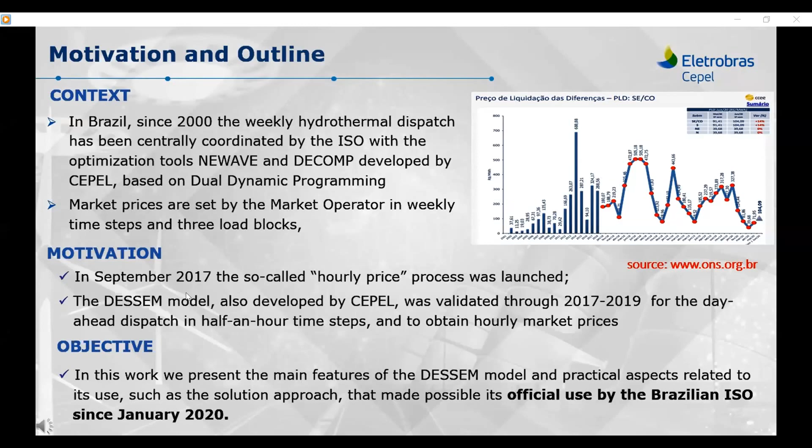Here we can see the Brazilian generation mix that shows the hydro-dominated characteristic of Brazil. The hydropower plants still account for around 70% of the total installed capacity, and we can see also an increasing participation of intermittent sources.

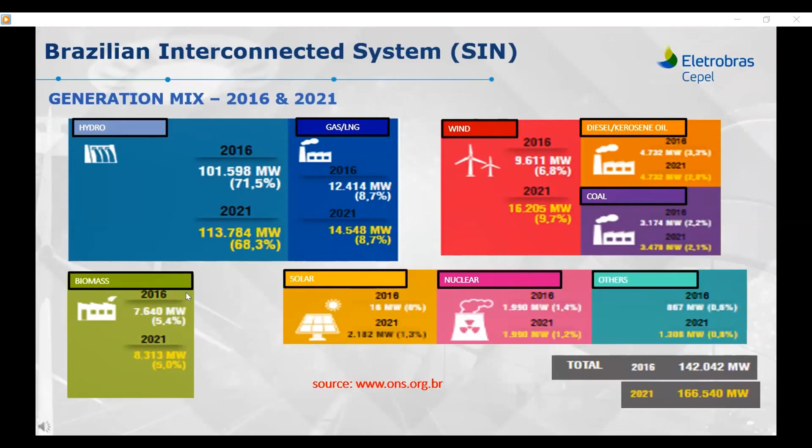Brazil has a large-scale system, predominantly hydro, with stochastic inflows to reservoirs and long distances between generation source and load. In this figure, we can realize that operating the system is as complex as operating the whole European electric system.

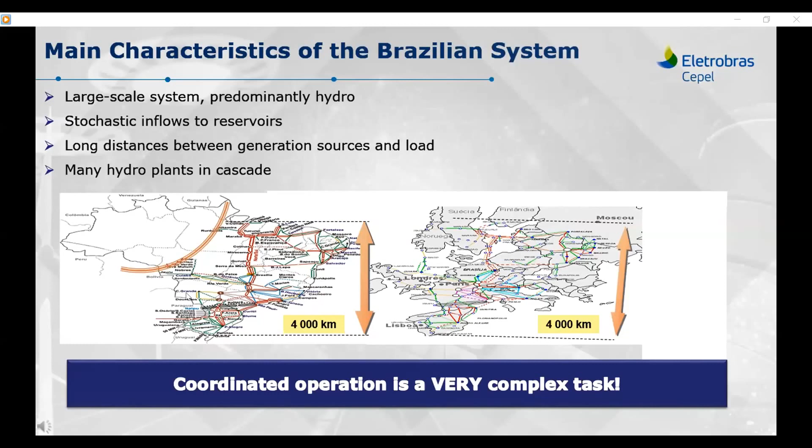In this diagram, we can see the total amount of hydropower plants throughout the whole country, coupled in cascade, that are centrally dispatched by the Brazilian ISO.

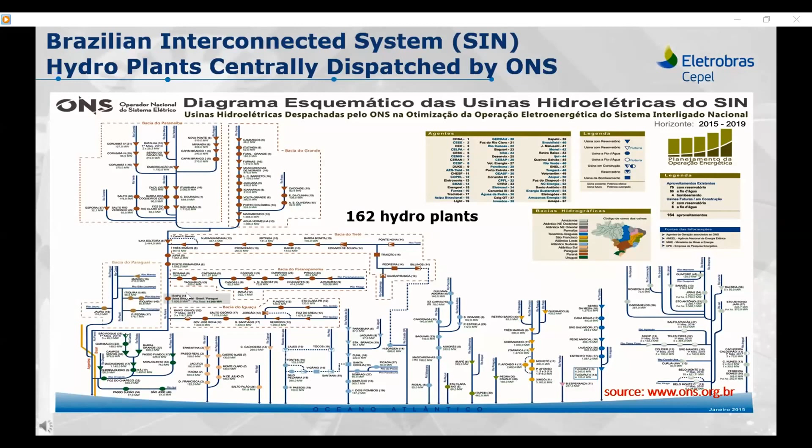The chain of optimization and simulation models developed by CEPEL and validated by government institutions and most private electric companies is officially used in the hydrothermal power generation plan of Brazil, to dispatch the system and set market prices, among other government planning activities.

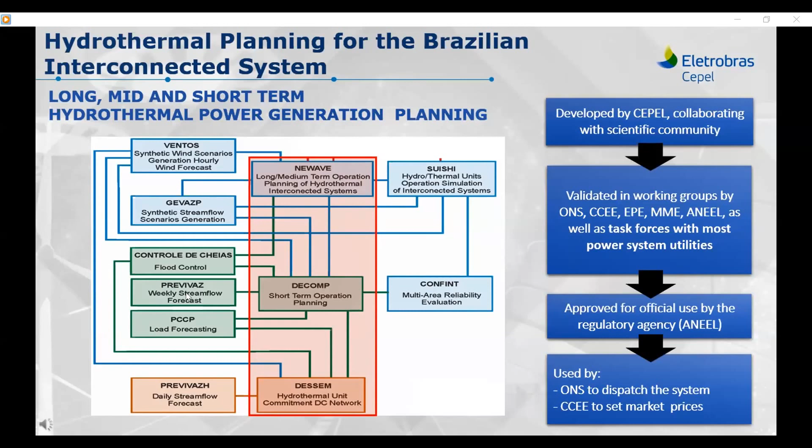In the central structure of this chain of models are the model NEWAVE, devoted to long-term operation planning, using stochastic dual dynamic programming; the model DECOMP, devoted to medium-term operation planning, using deterministic Benders decomposition; and the model DESSEM, devoted to operating the electric system day-ahead, that employs branch and cut together with specific feasibility pump and local branch approaches.

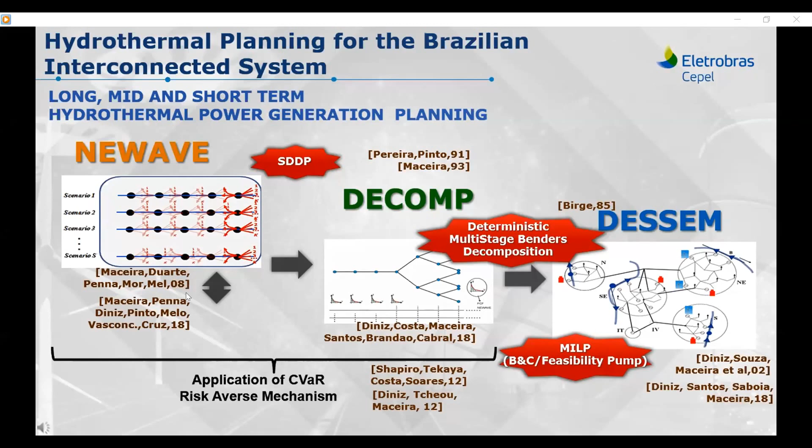These three main models work in an integrated form. The NEWAVE is run at the beginning of each month to build a cost-to-go function for the DECOMP model, which is run each week and also builds a cost-to-go function for the same purpose. This last one runs each day to provide the day-ahead dispatch and spot price. This continuous framework among these models we call the Rolling Horizon application.

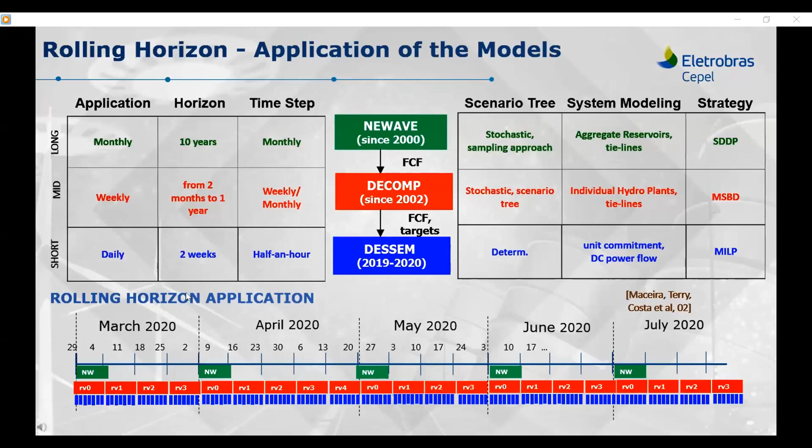The main objective of the hydrothermal coordination problem solved by DESSEM is to minimize the thermal generation cost and the water value in the reservoirs, coming from the cost-to-go function of the DECOMP model.

The model takes into account a detailed model of hydropower plants in cascade, the modeling of thermal power plants considering unit commitment aspects, and the intermittent generation technologies like wind and solar power, inside a DC flow network in a half-hourly time step.

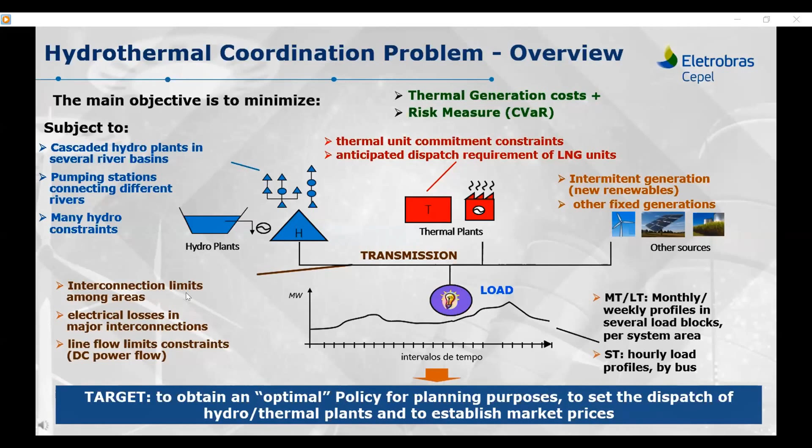The cost information of thermal power plants comes explicitly from the generation cost and the startup and shutdown cost. For hydropower plants, it comes from the water value, a function of the reservoir's volumes and the efficiency of the hydro plants available at each point of operation. Finally, intermittent technologies like wind have no generation cost, and the model can decide to use it as long as allowed by the daily wind forecast.

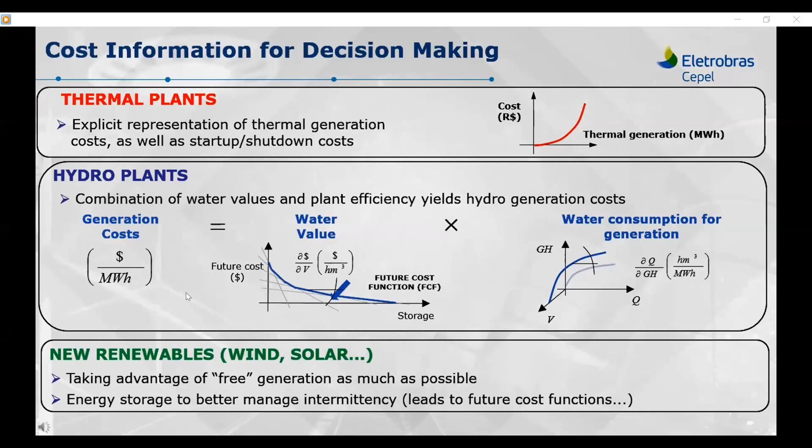The DESSEM model considers the power balance in each system area, a set of electric buses representing the main electric regions of Brazil. The generation technologies are plugged in each specific bus that are linked together through electric lines.

In the Brazilian ISO operation, it considers the first day in a half-hour time step and the following days in aggregated hour time steps that are coupled with the cost-to-go function coming from the computation at the end of the week.

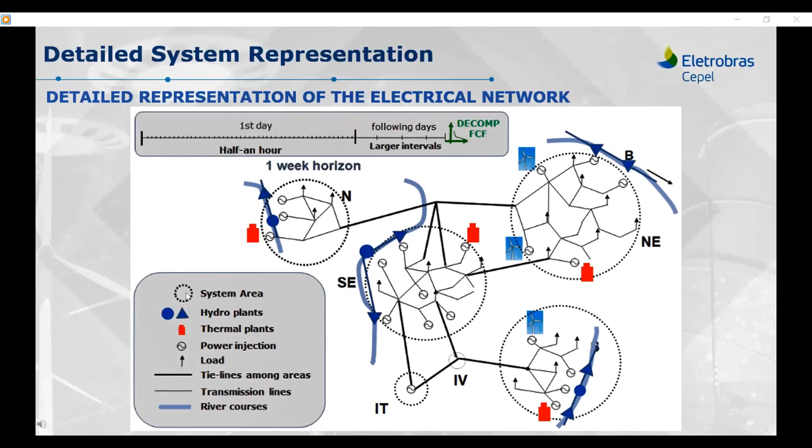In model DESSEM, the efficiency of a hydropower plant is a function of the water head, which is also a nonlinear function of turbine and spilled water. The so-called hydroproduction function is therefore considered through a piecewise linear approximation in 4 dimensions.

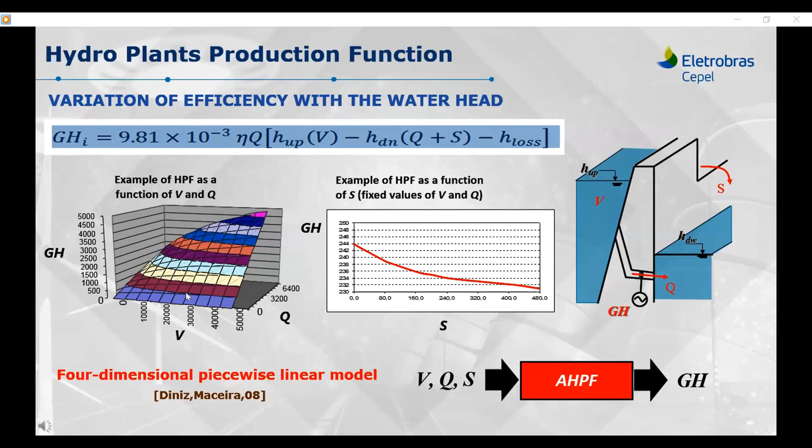The operation of the coupled hydropower plants is modeled in a detailed form that includes pump stations, filling of dead volumes, channels between reservoirs, modeling of river sections, evaporation in reservoirs, multiple uses of water, flood control constraints, among others.

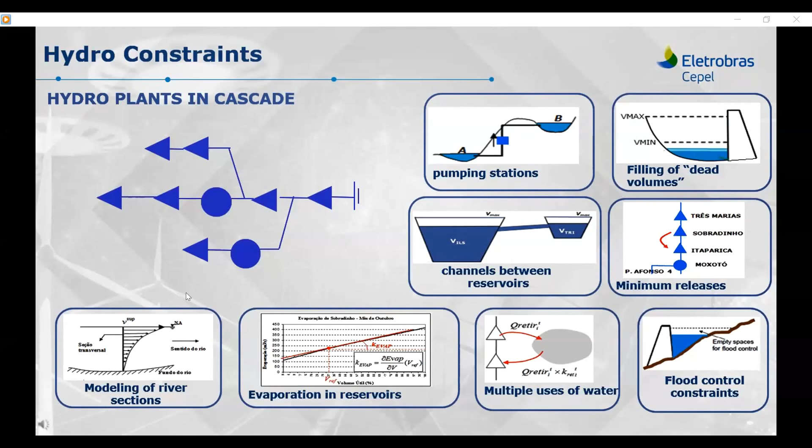Due to the time steps in periods of hours, the water volume discharged in a hydropower plant may not be available in the subsequent plant in the next period, since in some cascades the water can spend days traveling. In the model, river routing uses water propagation curves between reservoirs, which introduces a more complex coupling, because a plant can be coupled with its subsequent one in several periods of time.

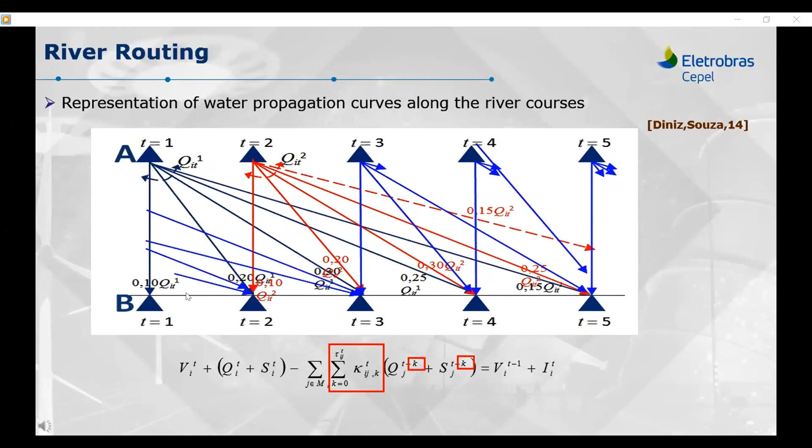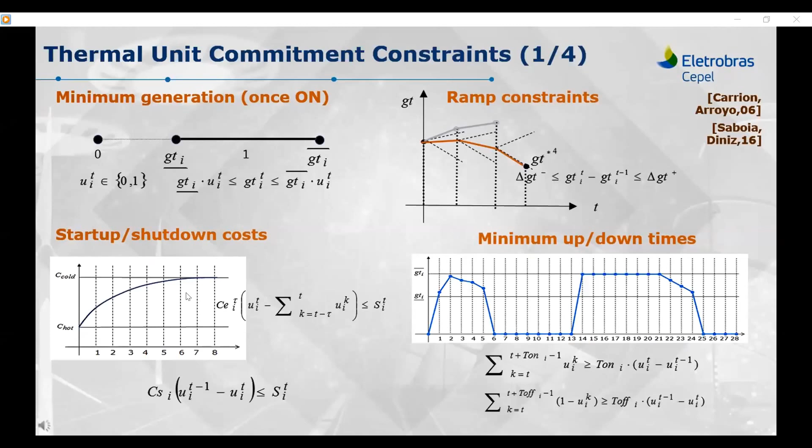The thermal unit commitment modeling employs classical constraints such as minimal generation, minimal up and down times, startup and shutdown costs, and ramping constraints. It also considers the startup trajectory from null to minimal generation value, as well as the shutdown trajectory between minimal generation to null value.

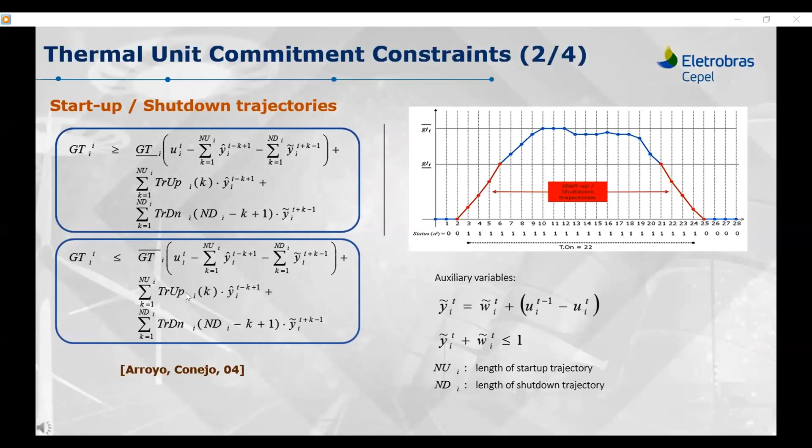The operation of combined cycle thermal power plants was considered through the concept of configuration modes. Each unit physically represents an integrated operation among real units of gas and steam turbines. This detailed representation is important since in Brazil there are thermal combined plants with high capacity around 1.5 gigawatts.

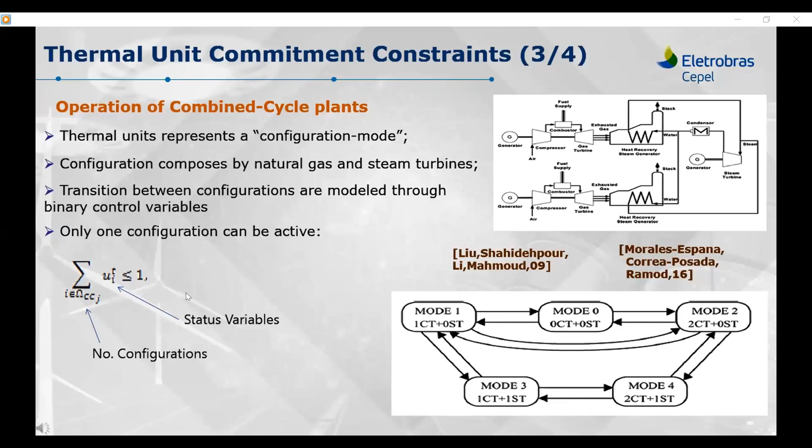Finally, it was modeled the possibility of transitions between units. In the following example, after a unit representing a gas turbine reaches its minimum, there is a transition to a unit representing a combined operation between gas and steam, without the need to first follow the shutdown trajectory of the first one. This model was based on an approach from literature, but some new concepts were considered and modeled with the use of binary control variables.

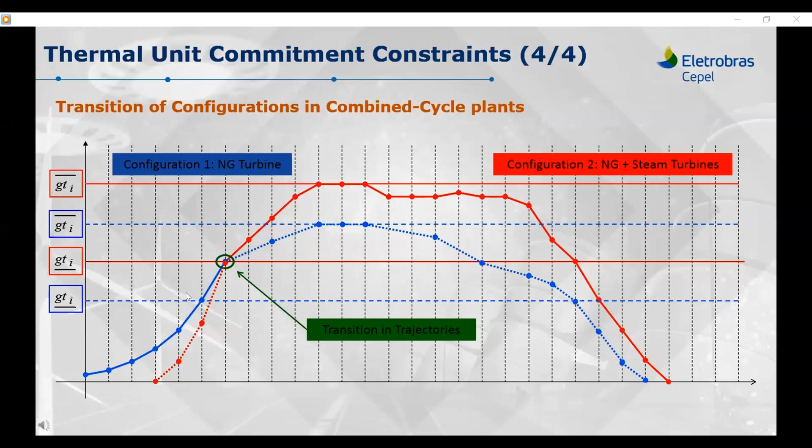The DC network is considered without explicitly representing the phase angles in the model. After optimizing the problem, the injections are applied in the corresponding buses to solve the DC flow that gives us the electric flow in the lines.

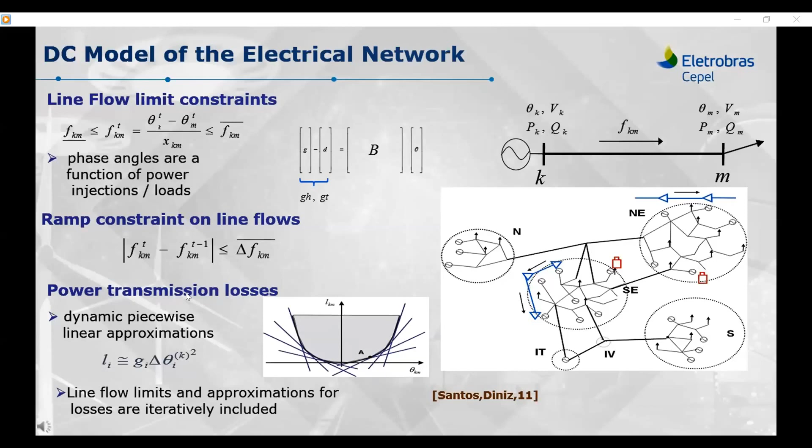If any line is violated, a new constraint is included and the model is run again, until no more violations in line limits are found. Into this concept, the model considers line flow limit constraints, ramp constraints on line flows, and power transmission losses.

It also considers security constraints on the combination of flows in some lines, given by a piecewise concave function, in which we can employ a lower piecewise linear concave approximation of it, or given by tables.

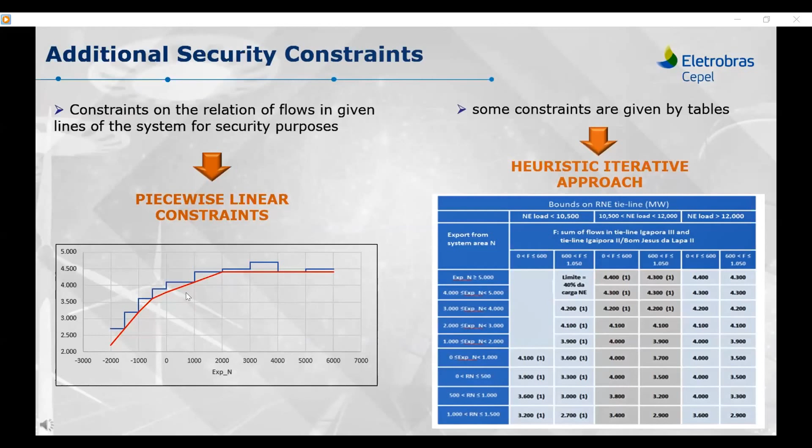Here we present the overall formulation of the corresponding mixed integer linear program with constraints such as electric load, electric network, water balance, approximated hydro production function, operative constraints, and thermal unit commitment.

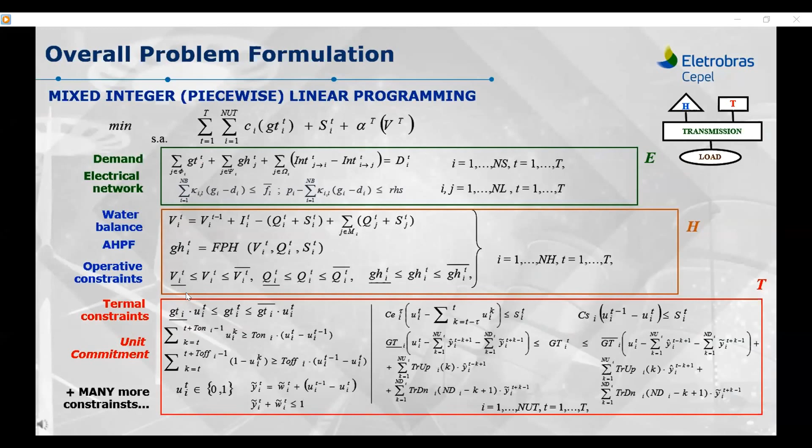The problem is a large-scale mixed integer linear program in which a typical daily instance used by the ISO has approximately 100,000 binary variables, 500,000 continuous ones, and 500,000 constraints. Also, the number of constraints grows along the iterations, since the network constraints are not binding; they are included on demand when violated.

To solve this problem efficiently, an approach was developed that uses in an integrated form the interior point algorithm for linear programs, the branch and cut algorithm for mixed integer programs using the simplex solver, and a modified version of feasibility pump.

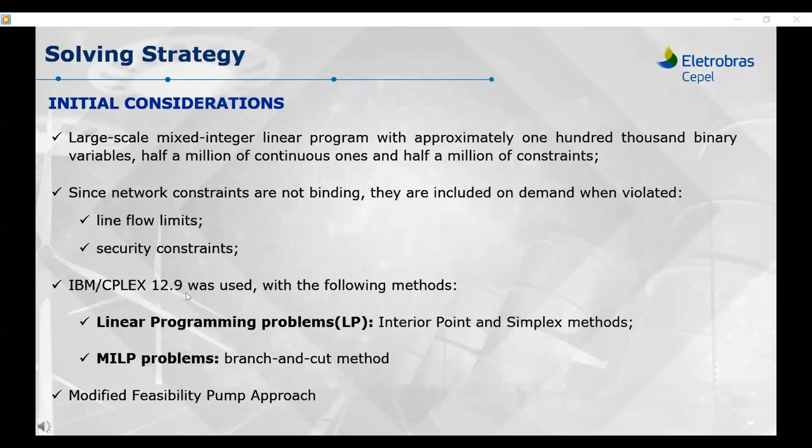To solve this problem, we have tried some approaches ranging from exact to approximate ones. In the exact approach, we solve to optimality a sequence of mixed integer programs to introduce violated network constraints. Due to this, the computational time becomes around 12 hours, which is forbidden for the application of the ISO to determine the daily Brazilian hydrothermal dispatch.

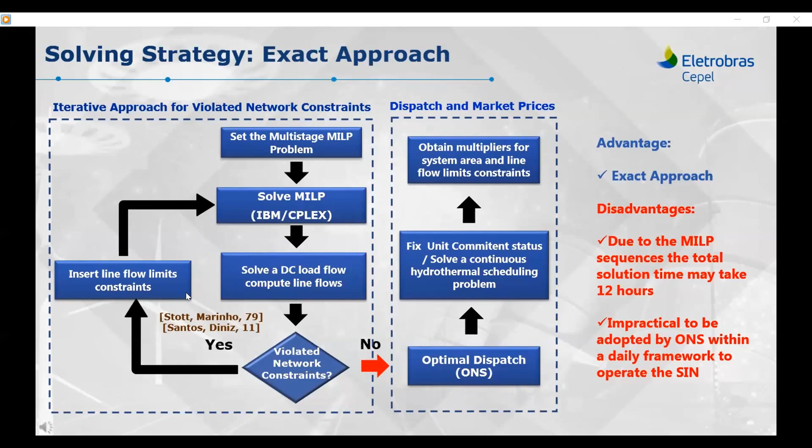In the approximation approach, we found a feasible integer solution inside an optimality gap. First, we use the linear relaxation in the iterative approach to introduce violated network constraints, finding a lower limit. In the sequence, we solve a mixed integer program and fix the optimal thermal unit commitment status in order to find an upper limit after applying the iterative network approach again.

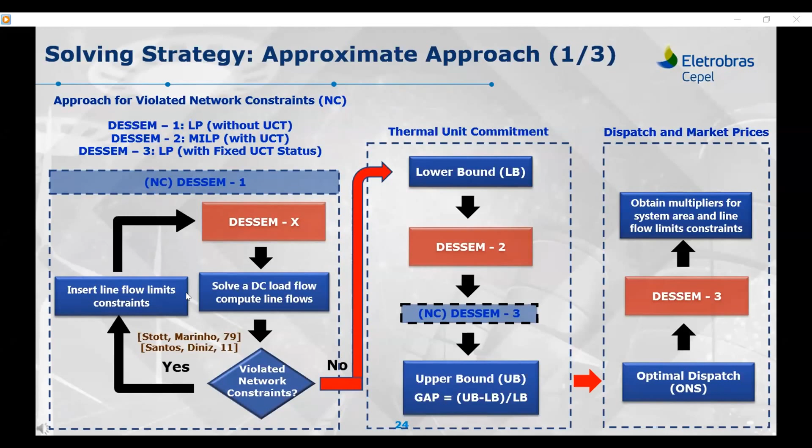With the approximation approach, the sequence of linear programs followed by a single mixed integer program drastically reduces the computational burden. However, in the set of approximately 250 instances of shadow operation from January to October of last year, an expressive amount of cases presented computational solution times ranging from 2 to 4 hours.

Unfortunately, the solution time was still not adequate to use the model by ISO inside the daily framework to operate the Brazilian system. Therefore, the ISO imposed that the maximum allowed time in most cases must be 2 hours.

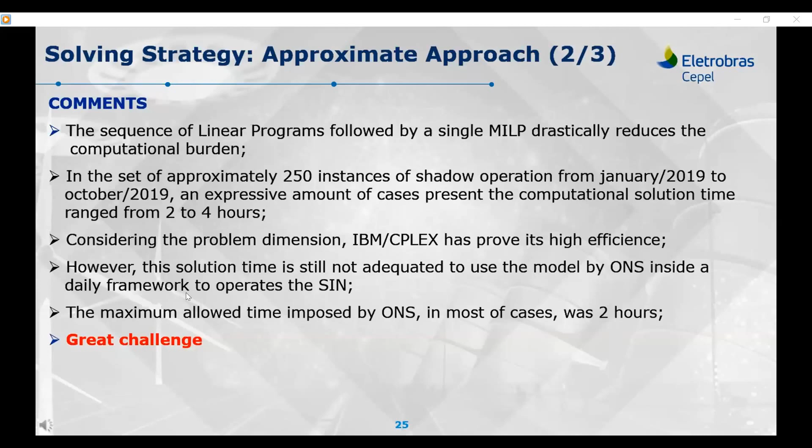We have developed a modified version of feasibility pump for the DESSEM model, which can be briefly summarized as follows: first, it works with the linear relaxation solved with the interior point method. Second, it rounds the fractional unit commitment status to the nearest integer. Third, it adds a penalized term in the objective function inducing convergence to the desired integer. Fourth, after some feasibility pump iterations, for alternate units, it fixes those whose status are still undefined.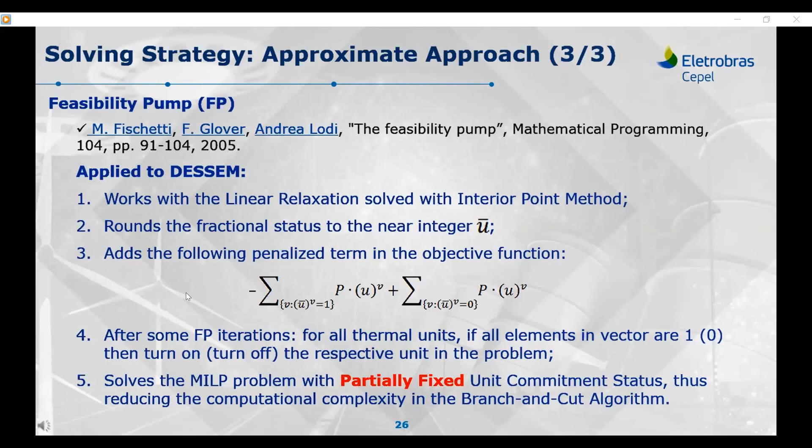In the approximate final approach, we use the modified feasibility pump to warm start the branch and cut with a partially fixed unit commitment status, thus reducing the computational complexity.

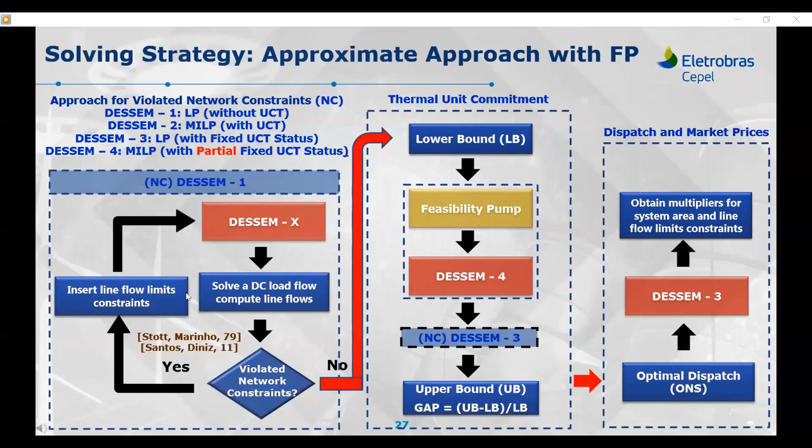With this new approach, we have attained the condition imposed by the ISO relating to computational time. In the set of instances of shadow operation from January to October of last year, the average solution time was 50 minutes, and only 5% of the cases were solved in more than 2 hours. Also, in the whole set of official instances of this year, the average solution time was 34 minutes.

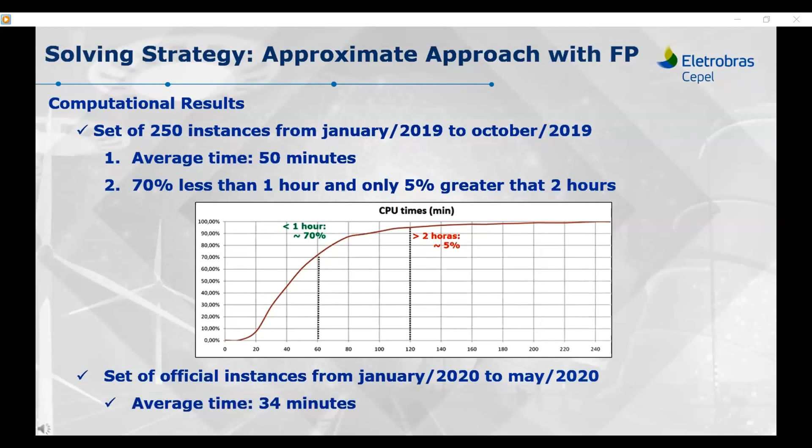Since the DESSEM model is a non-convex problem due to the binary unit commitment status, we have used the approach of fixing the optimal commitment and solving the resulting linear program, thus obtaining the respective Lagrange multipliers. The market price of system areas is given by the weighted average of the nodal price in all buses.